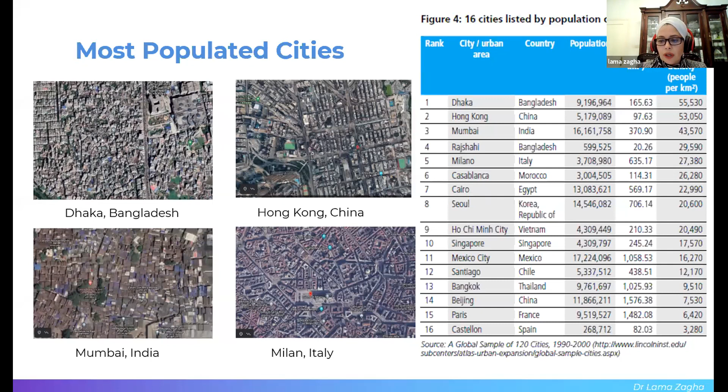Here we see the most populated cities in the world, with densities of 17,000 people per kilometer square reaching up to 55,000 per square kilometer. Dhaka, Bangladesh is the most dense area in the world, with around 55,000 people per kilometer square. There is variety though - Paris, for example, is less dense, about 6,420 people per kilometer square.

Urbanization has opportunities and challenges. It enhances the local economy, provides services for people, and better housing options. But the challenges are much more severe: it puts pressure on the provision of services, creates urban sprawl, increases poverty, unemployment, and housing shortages, as well as environmental disturbances we've seen recently, such as climate change and floods.

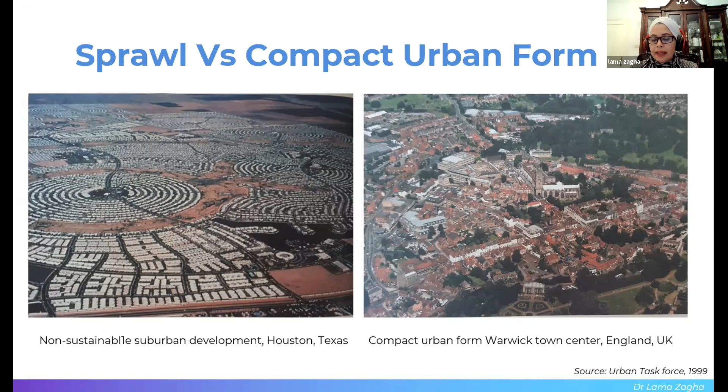On the right side, we see the compact urban form of Warwick in England, and we see how when we live nearby with diversity, with different services, we live in an area where we can live, work, play, and study.

The Interstate 405 in Los Angeles is an example of what's been done also in the United States. Around 2016, the United States put around $1.1 billion to widen the Los Angeles Interstate. This interstate is basically a freeway that goes from Irvine in the south to Los Angeles, ending in San Fernando.

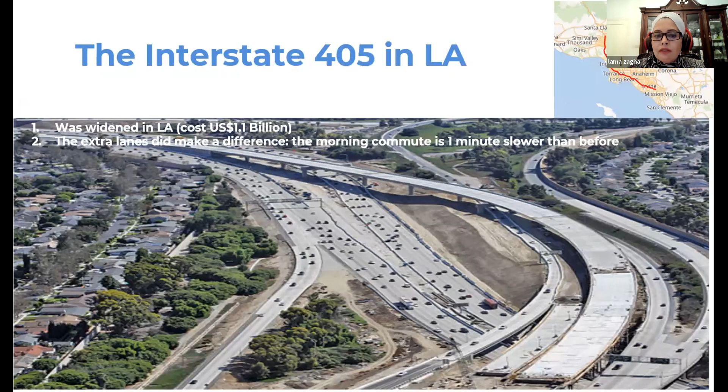Suburbs. The American dream is about living in the suburbs, having 2 cars, having a nice large house, and this is what every American aspires to. But what you see is really tragic: people commuting on the highways from where they work to reach where they live. It's a car-dependent environment—inefficient, unsustainable, and disconnected. Right now America is seeing that this is a dilemma of what they have planned, and this is transferred to the developing world as well, as we'll see later on.

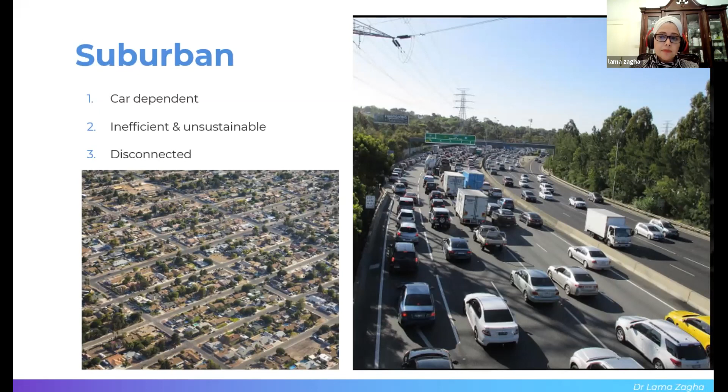We're going to talk now about sustainable neighborhoods. Sustainable neighborhoods, goal number 11 of the United Nations Sustainable Development, was introduced along with other goals in 2015, with the aim to make cities and human settlements inclusive, safe, resilient, and sustainable.

Goal 11 shouldn't be studied alone. It should take into consideration goal number 3, good health and well-being; number 10, reduced inequalities; 13, climate action; and 17, partnership for goals. Goal 11 addresses very important issues about transportation for all, whether you are a woman, whether you have disabilities, whether you have small children. So transport and public transport should be thought of as inclusive for all. Another issue is having green areas and public space accessible for all people, even those with disabilities.

What's sustainability? Sustainability is defined by the World Commission on Environment and Development as meeting the needs of the present generation without compromising the ability of future generations to meet their own needs. It refers to a well-balanced socio-economic and spatial aspect. We shouldn't look only at the economic aspect, as is done in developing countries by housing everything in the capital. We should always think about economic, social, spatial, and environmental issues in a balanced way, and there are so many dimensions to this that should be studied cumulatively.

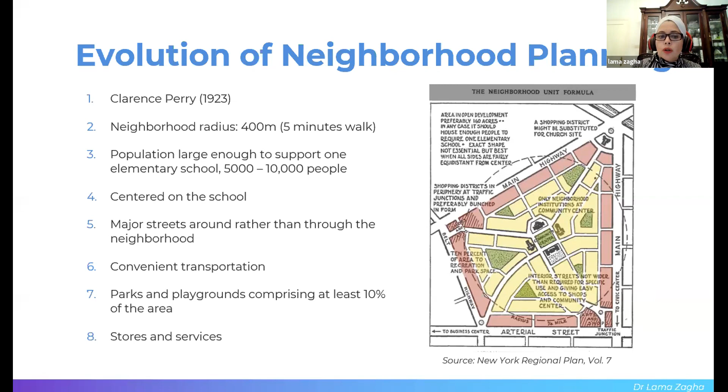Another movement in the States began in 1980, called New Urbanism. It's an urban design movement that addresses the ills associated with urban sprawl. It addresses walkability, 5-minute walking distances, and neighborhoods containing a range of services, housing types, and jobs.

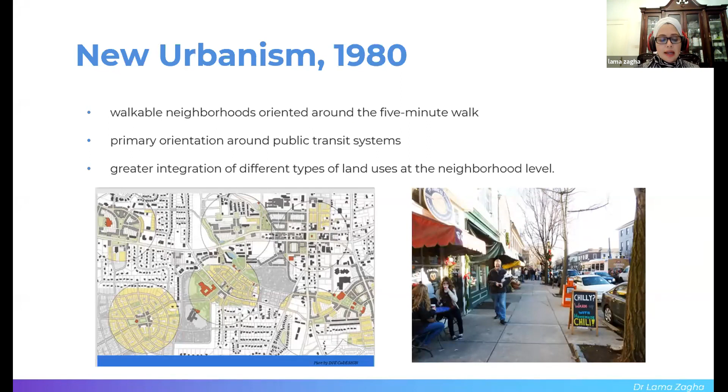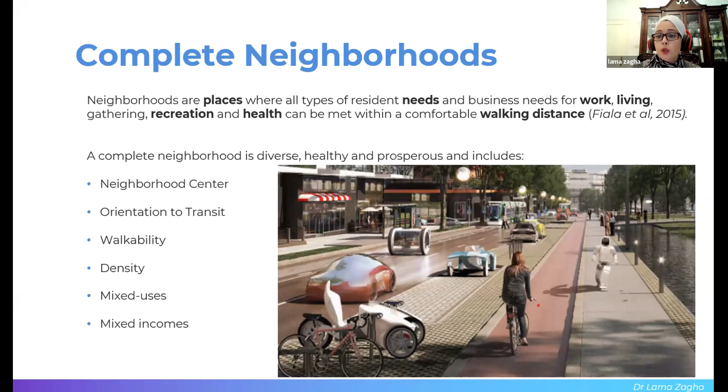So what is a complete neighborhood? It's a neighborhood that has everything a resident needs—for recreation, for jobs, for services. It has a center, it's close to transportation, it's walkable, and it has a proper density with mixed uses and mixed incomes.

I don't know if any of you have heard about Curitiba in Brazil. It's one of the first cities to market itself as green, back in 1980. This is owed to the mayor, who was an architect named Jaime Lerner. He wanted the people of Curitiba to live happily and healthily, by having more green spaces and providing good public transport.

In this area, you find spaces for biking, for buses, as well as for vehicles. 70% of the people rely on public transport. There is over 50 square meters of green space per capita, which is a huge amount, and around 145 kilometers of bike lanes. There are forests—you feel you're living in a forest, with parks and green space.

Paris, on the other hand—the recently elected mayor, Anne Hidalgo, announced in April 2020 that she wants Paris to be a 15-minute city, where all essential services—housing, working, healthcare, education, or leisure—can be reached within 15 minutes, walking or biking from wherever you want to go. This is about reinventing the idea of proximity or nearness.

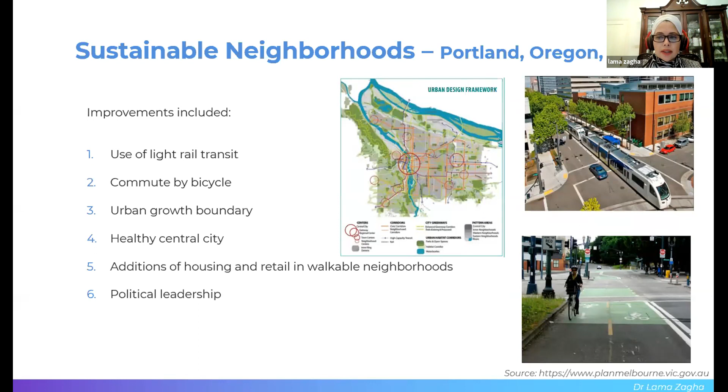This is also about political leadership. Citizens alone cannot change things—political will is an important issue to address while moving toward sustainability.

Melbourne, Australia, is another example of what can be done. They had a plan from 2017 to 2050 aiming for 20-minute neighborhoods, where everyone locally can access basic services within walking distance, as well as reaching public transport. They want to make Melbourne healthier and more inclusive.

They researched this area and thought about connected paths, the public realm, services and destinations, and quality. It's not just about providing public transport—you have to provide good quality public transport and proper densities to thrive and enhance the local economy.

So they put in place strategies, policies, and principles to address these issues, and they are tracking their progress. Their strategies include movement, housing diversity, streets, destinations, streetscape improvements, public space, community infrastructure, sense of place, and healthy food.

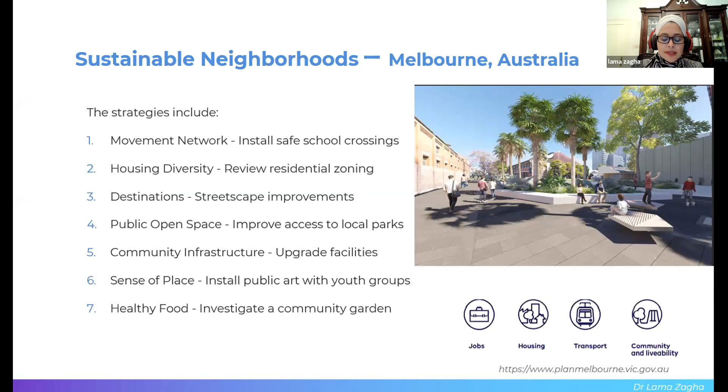So different features within the 20-minute neighborhood of Portland, of Melbourne, focusing on walkability, community gardens, local schools, housing diversities, streets and spaces, and so forth. The catchment that they thought of is about a radius of 800 meter walkable with mixed uses, as we've seen in this slide.

So sustainable neighborhood has socio-economic benefits as well as health benefits. We can combine health benefit with social benefits, but here we're gonna see that it's separate. Economic benefits: you're gonna increase transportation capacity because people will depend on public transport to move around. If you have a good public transport, people will use it. It will also reduce the cost of the expenditure on transport, of using your own vehicle to move around from one space to another.

Lower health costs, because within the sustainable city you'll be moving, walking around, having less health problems, and this will be a lower cost on the government to cure you. Increasing trading because of density and people living in the area enjoying different services. So there will be viability to build, and this will increase the economy. And if this is done for the suburb, it will also increase the viability of the suburb.

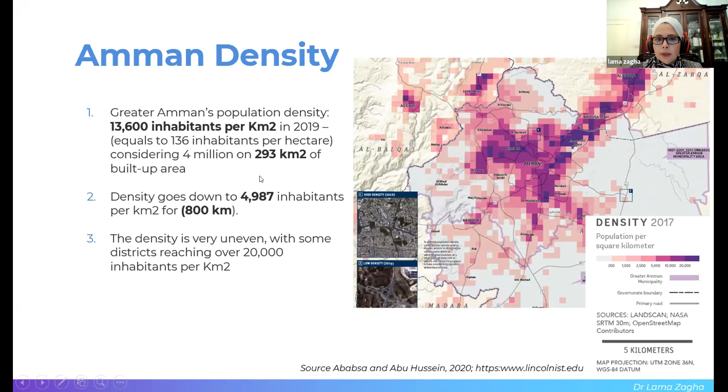The density is uneven, and this image on the right shows the disparity between the east and west of Amman. The east is so overcrowded that it's reaching over 20,000 inhabitants per square kilometer. In this image we show the variance of population densities: in the east of Amman, 20,000 people per square kilometer, whereas in other areas, just west or even south of Amman, we see minimal densities reaching as low as 1 person per square kilometer. This is the varied density because we don't consider density when planning.

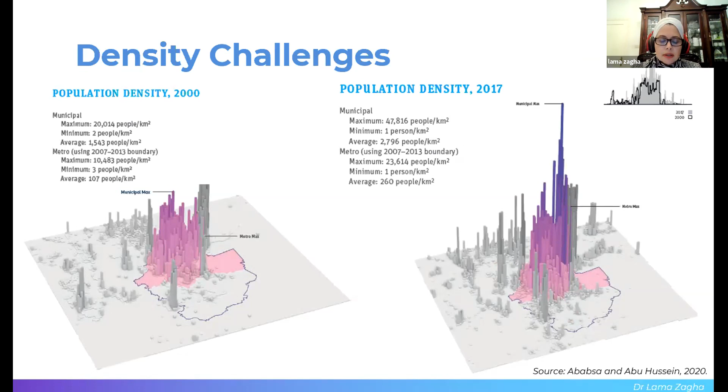So we have many challenges. Increasing population is not a problem, but the problem is planning. If we don't plan right, we'll face the circumstances we're seeing, and now climate change is one of the effects we should tackle.

Inefficient public transportation, narrow and unmaintained pedestrian paths. People can hardly walk on the pavements. If you move around in Amman, you see people walking on the streets rather than the pavements, because pavements are either poorly designed or not maintained, so it's hard to walk on them.

There is lack of open spaces, noise, pollution, congestion, lack of affordable housing. We have a problem where we don't see a clear vision, no strategies and comprehensive plans. There is socio-economic inequity, urban sprawl, and outdated building laws, as well as climate change.

The effects of climate change were witnessed in 2015, the flash floods in Amman, where heavy rains caused severe flash floods which led to loss of life, damaged properties, floods on the streets, and people trapped in their cars and homes.

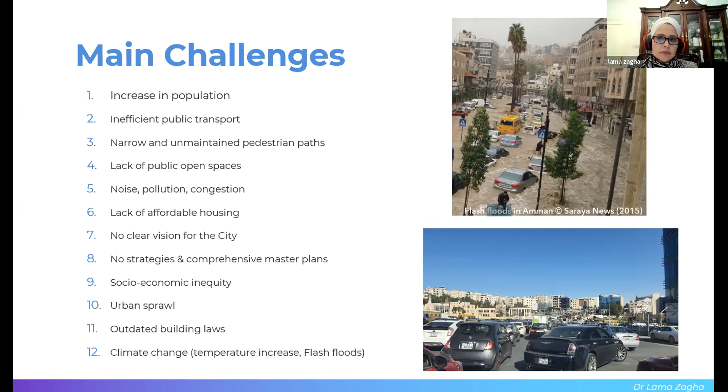Sprawl. I want to talk about this because it's an important issue. It's hard to find affordable plots in the inner city of Amman, so associations tend to offer plots to their members in the suburbs on agricultural lands where no services are found.

Here is an example of one of the projects in Tunaib, done by the Jordan Engineers Association. These are service plots, you just buy a plot and build there. But how are you going to reach your work? How are you going to buy food? How are you going to send your kids to school? People who build there need to spend 33 minutes going and coming back and forth to work or to send kids to school.

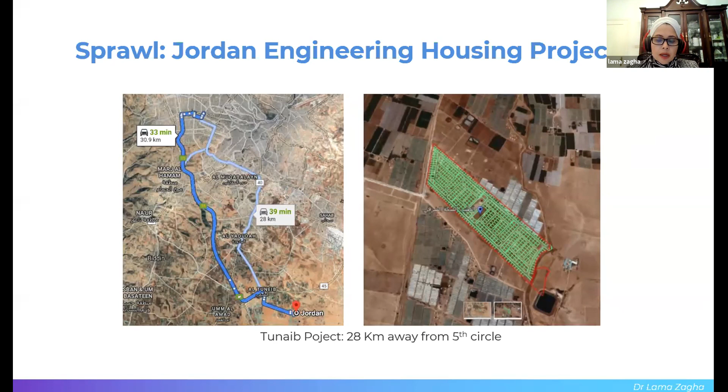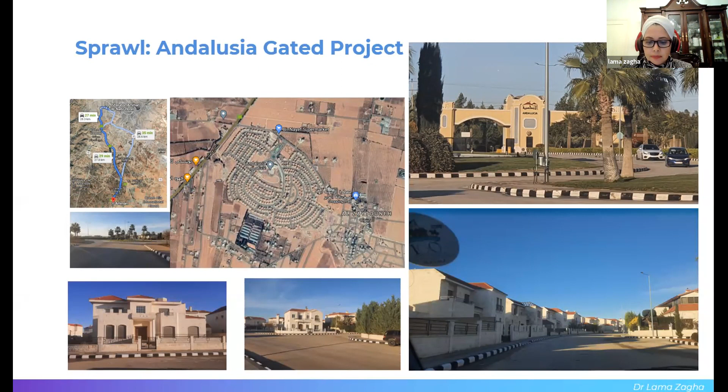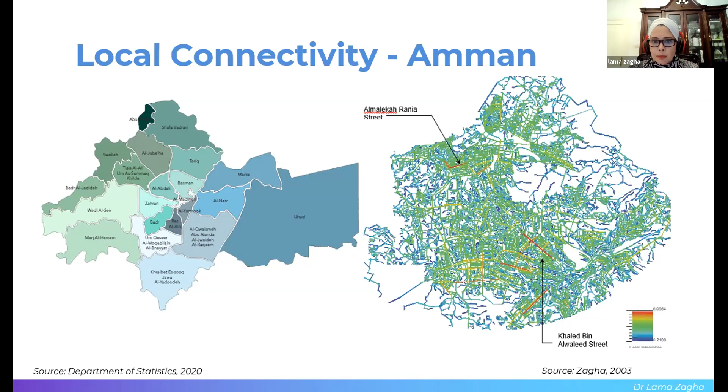Sustainable neighborhood principles. I'm going to discuss the principle of sustainable neighborhoods. We need to talk about walkable radius. A 5-minute walk, around 400 meters, is acceptable for different people. But for children, they may need to walk around 300 meters.

We need to think about walkability and people reaching their destination while walking, to reach mixed use, open spaces, public transport, mosque, and elementary school. This encourages us to move around when we have a walkable neighborhood. So walkable streets are a measure to reduce congestion and reliance on cars, as we see today.

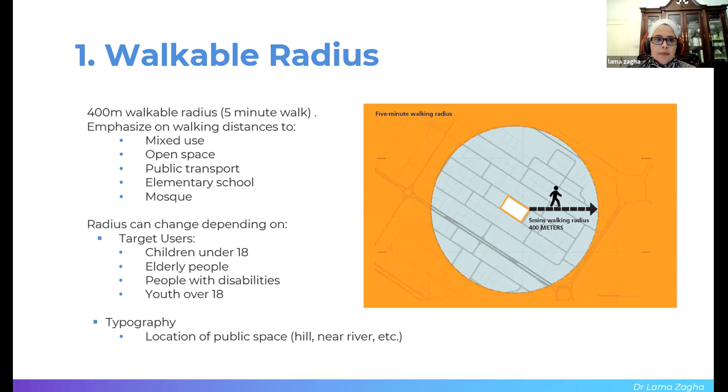When we say 15 minutes or 5 minutes or 10 minutes, it depends on the distances we move and our walking speed. If we take the walking speed as about 4 or 5 kilometers per hour, we can see the parameters of 400, 800, or 1,200 meters for a 15-minute walk.

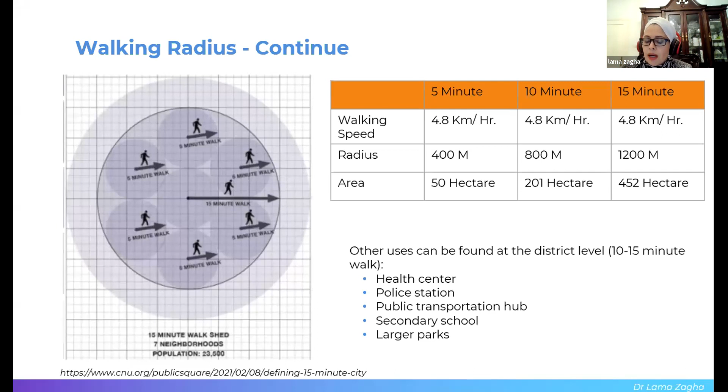The importance of this is to consider that if we have a neighborhood of 5 minutes, the services we offer will be different than when we walk for 10 or 15 minutes. At 10 or 15 minutes, we can provide further services such as a police station, secondary school, larger parks, and health center.

This slide shows the importance of not just a walkable radius but also a connected radius, with no lack of connectivity. We need to consider children's ability to walk only 300 meters, while in rural areas people tend to walk more than in urban areas, possibly an 800-meter radius. Also, if there is no crossing, we need to consider it as an edge for the 400 meters.

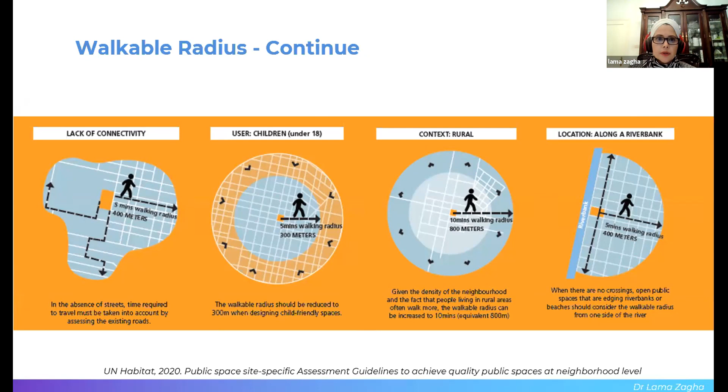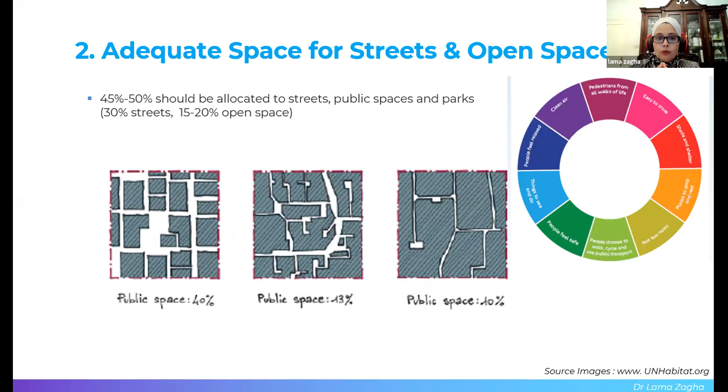Adequate space for streets and open spaces—we mentioned that we have to have space for streets and open spaces. This should account for around 50%: 30% street and 15 to 20% open spaces. This is the least amount, and if we offer more space for open spaces, that would be great.

Mobility. Streets should provide mobility for pedestrians. When we design our streets, we should consider pedestrians, bikes, and universal accessibility. People with disabilities—we need to consider their needs when walking around. Why? Because they're disabled doesn't mean they cannot walk; we have to provide them the right environment to walk. We must also consider accessibility for public transport and private vehicles. Some streets should be limited to public transport, whereas others should be limited to cyclists and pedestrians.

And also, when we think about cycling, we should think about cycling to reach public transport, where people can basically stock their bikes and take the public transport.

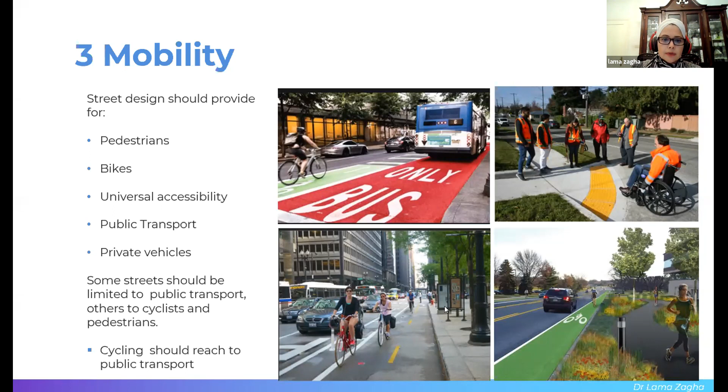I wanted to show this project that we've done for Irbid Development Company. This is the master plan. And this is what I want to address, that we need to specify the space needed for pedestrians, needed for the tree, needed for parking, and needed for the vehicles, as well as for open spaces. So we need to study in sections and in details, and to designate where everyone will move around.

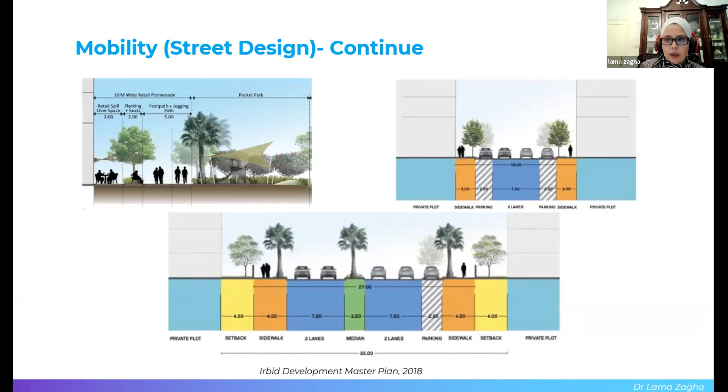It's not about only offering public open spaces. We should offer good quality of public open spaces. It will contribute to good sense of citizenship. It will encourage you to walk, and it will reduce the impact on climate change. So public spaces should be secure, green, social mix, multifunctional, accessible, inclusive, and with amenities.

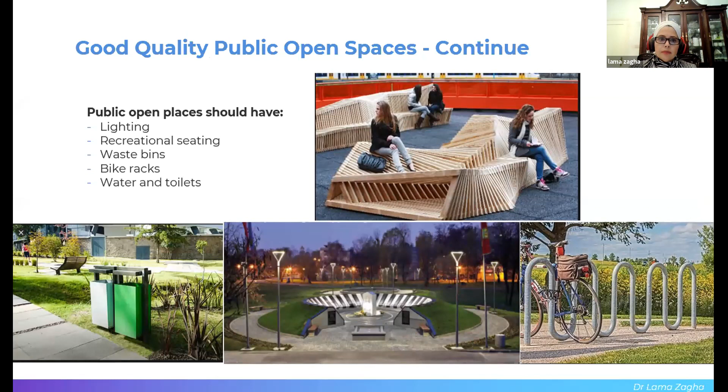Connectivity. Connectivity will allow one to move. So it's not just designing streets. We need to design connected streets and not disintegrated or disconnected streets. This will reduce congestion, will improve mobility, and it will enable people to reach and have choices to reach the goods and services.

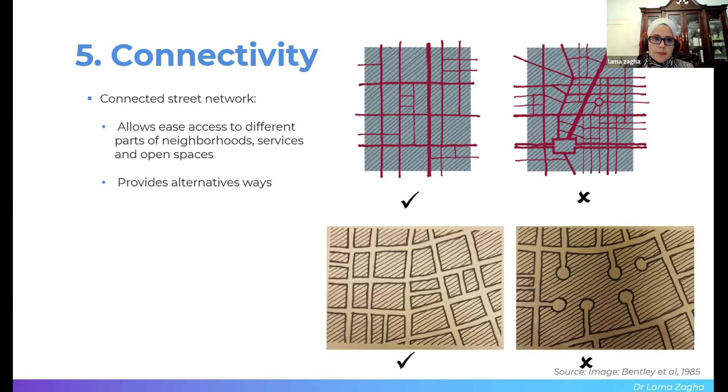Mixed use. We should design mixed use neighborhoods. We need to combine economic, housing, administrative in one area. This will reduce the need to travel. It will provide closer public services, create local jobs, and promote local economy. We should also think always about integrating mixed land use with transportation planning.

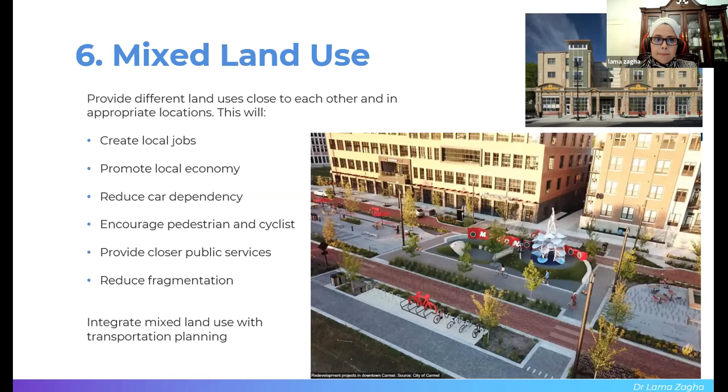That's what we talked about. We talked about this because we don't design with proper density. So if we take density into consideration, we will eliminate urban sprawl, and we will see more people residing next to each other. So it will resolve urban sprawl.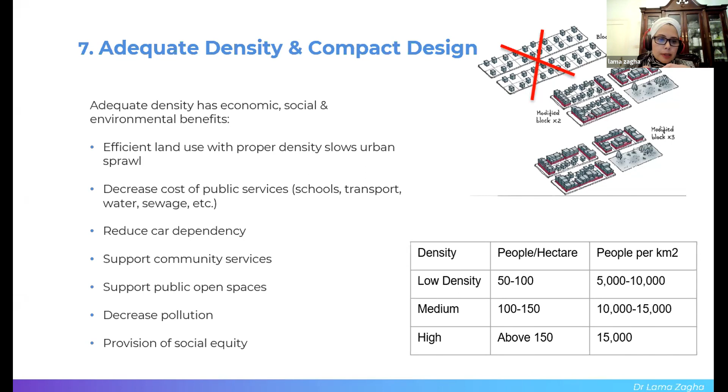Mixed social structure. We should stop—like here in Jordan, we're having East and West Amman, and each have its own urban morphology. We need to integrate people. We need to integrate social structure together.

Because if you have a neighborhood, there will be different jobs. So in order to minimize people's commuting time, you need schools, you need teachers, you need, let's say, even a mailman, and so forth. You need lower class jobs. And this is what we're talking about, that we need to offer housing for those people in need, and basically to allocate at least 20% for affordable housing within our neighborhoods.

We need to think about social equity that we always neglect. People without money, unfortunately, now reside in overcrowding situations. We need to think about having people living together to enjoy interaction, to enjoy diversity, and allocating different types of lots, not just homes. We can allocate different types of lot sizes, housing types, and mixed tenure, whether rent or ownership, as well as having different regulations to accommodate such diversity.

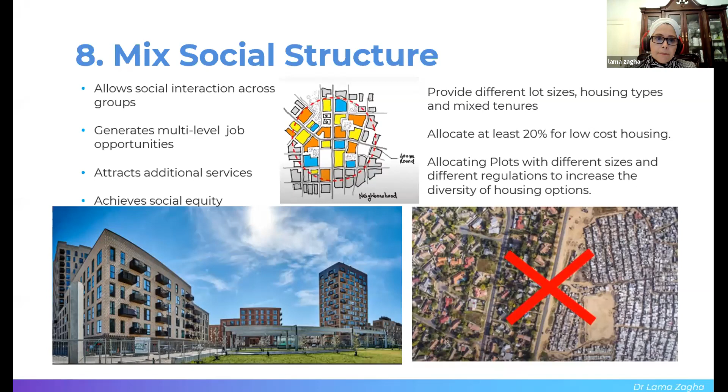Integrated neighborhoods. Neighborhoods shouldn't be segregated. They should be integrated together at the neighborhood level, as we see here, as well as at the district level.

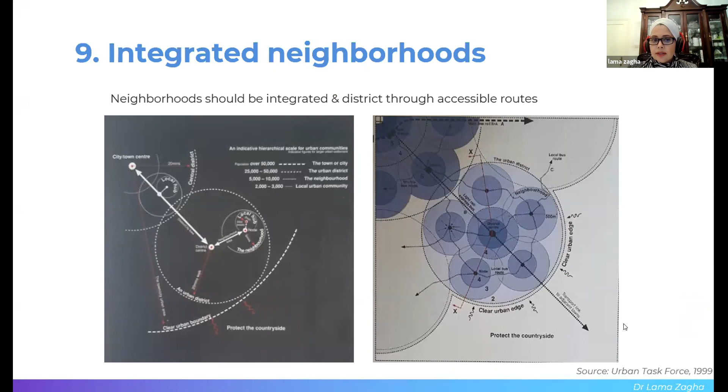There should be integration also of reliable transport within neighborhoods and districts. The transport should be reliable, punctual, and attractive for people to use. Right now we don't use it, and basically I myself don't use it because it's not attractive to me, it's not punctual, there's no quality of buses, and it's not reliable. So if you offer good service, people will use it, and I will use it as well.

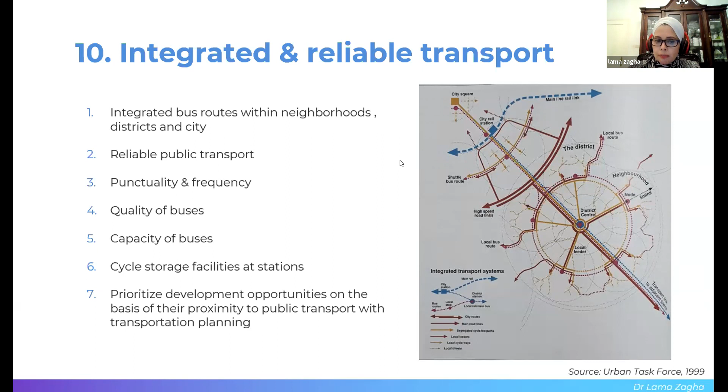So we need to consider the capacity also of the buses. And when we think about public transport, we need to think about development opportunities close to the public transport routes.

Mobility shift. We need to encourage shifting from energy-intensive mobility, such as the car that we're using today, to walking, cycling, and public transport. So think about your life now without the car and how you will enjoy living much better. I assure you we will all live happier if we don't have the car, but if we have the proper ecology, it will make us move and cycle safely and have attractive scenery to enjoy.

So the scene that we should see is not the domination of the car, but we need to see the domination of the pedestrianized street.

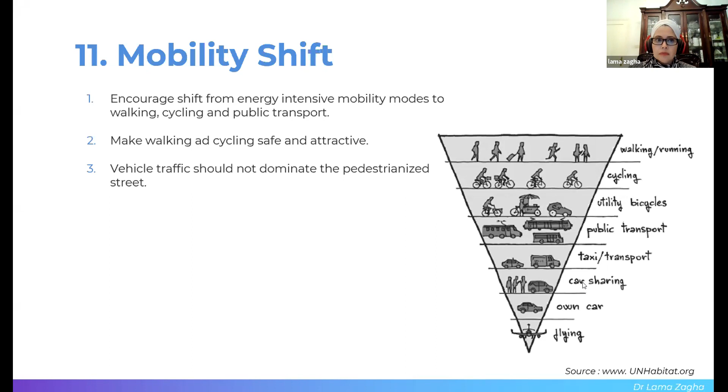Green transport. We need to promote transport by shifting from fossil fuel vehicles to either hybrid or electric cars. The government should invest in this and consider this within their policies. This will reduce CO2 emissions as well.

This is a quote from Christopher Leinberger. He says that the best economic performance in modern society is found in walkable urban precincts. So it's the economy, it's hand in hand. You have better economy if you have walkable neighborhoods.

These principles can be applied for growing cities, for new neighborhoods and urban extensions, for densifications, and for urban renewals.

Conclusions. I'm going to talk about how we began. We began with Jane Jacobs talking about the importance of walkability and of having streets and open spaces, the vital organs of the city.